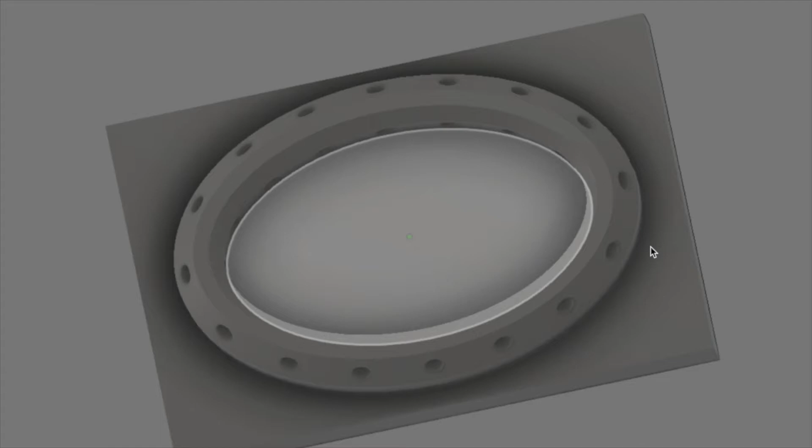Okay, today I'm going to talk about how to design soft jaws for your vise.

So, soft jaws, most commonly they're aluminum, but you can do steel too. The purpose of a soft jaw is to have a jaw that is replaceable on your vise, which you can cut into and

make different shapes for holding different parts. So your typical rectangular part has a straight cut. Here we have a straight cut for holding like a square part or rectangular part. You can also see I've cut some, like this is an elliptical shape for an elliptical part. I have an even crazier shape in here, and then down below is for holding a round piece of stock.

So they're really nice because you can cut a lot of different shapes into them to hold different oddly shaped parts. They also protect your vise. In a lot of cases, if you're going to crash your machine, you run into the soft jaw before you actually run into the vise, which is helpful.

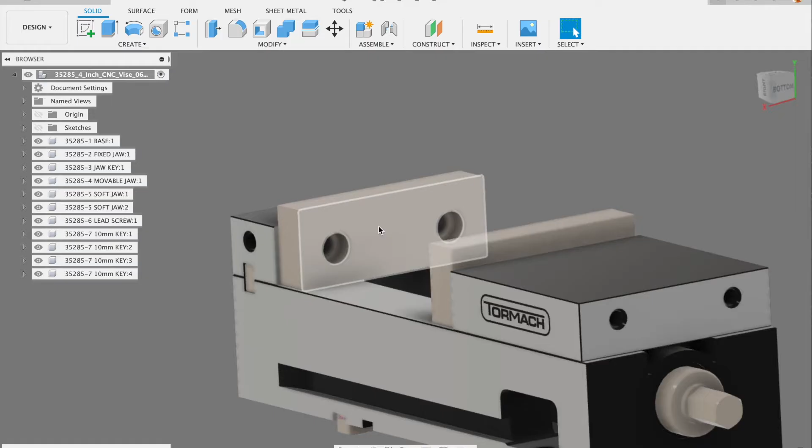So let's get started. I downloaded this vise from the Tormach website. This is the vise I have on my machine, it's a 4-inch vise. I went directly to the Tormach website, found their 4-inch vise, and it gives me some of the details on the hole tap sizes and stuff. It's either in one of these, it gives me the step file, which I downloaded and uploaded into Fusion 360.

So look at the vise you have, see if you can go to the manufacturer and find that step file or a similar CAD file. And there's also some CAD files for vises saved in Fusion 360's CAM examples - that should be already in your data panel here.

So, coming back to this, there's a few things I want to do. Very first thing, I'm going to right click on this top level component and come down to the very bottom, capture design history. So for some reason, when you import a model like this into Fusion 360, it turns off design history capture, and we absolutely want design history to be captured. So that's the first thing.

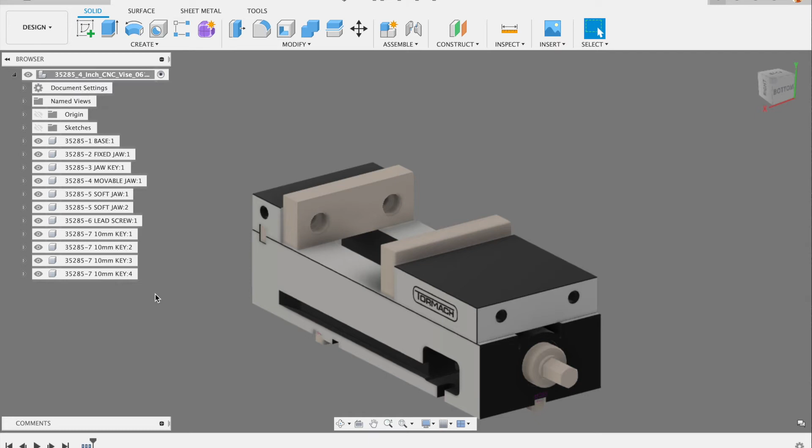The next thing, let's see if I can - so I'm going to select the top one, hold shift, and select the bottom one. So all these components, I'm going to right click and ground. And the reason I'm doing that is because the reason for components is you can move them independently of each other. And since I'm going to use some geometry from this jaw and from this face down here, I don't want those moving around on me because my soft jaw is going to be dependent on the location of those holes.

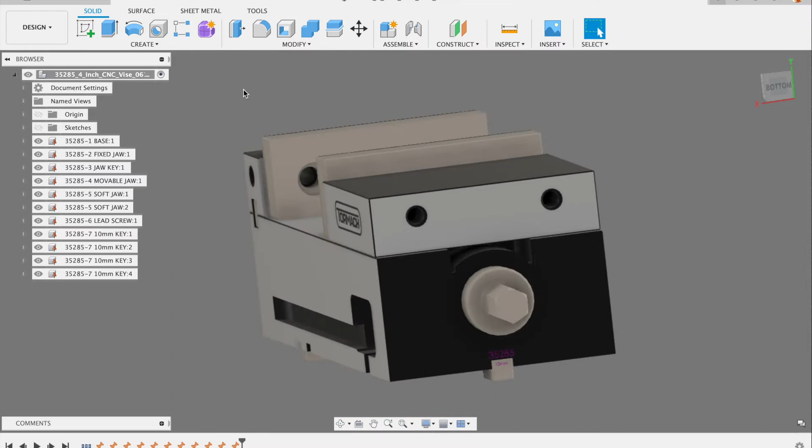So those are the critical first steps, and you can see down here, I already have that design history being captured where I'm grounding those.

Alright, next thing I'm going to do is create a new component. So I'm right clicking on the top level component, new component. And this is a new thing in Fusion 360 where you can create your new component as an external file, which is then linked to this file. It's kind of modeled after the way things are done in SolidWorks, where you have assembly files and then part files are separate, so you can work on your part outside of the assembly while it's still linked to that assembly.

For this, I'm going to be working on this part only in this assembly, so I'm just going to keep it internal. So the name I'll just call Alex's soft jaw, and everything else is good. I'm going to hit OK.

And as soon as I do it, it activates that component, and everything else becomes transparent. So let's see what we want to do here.

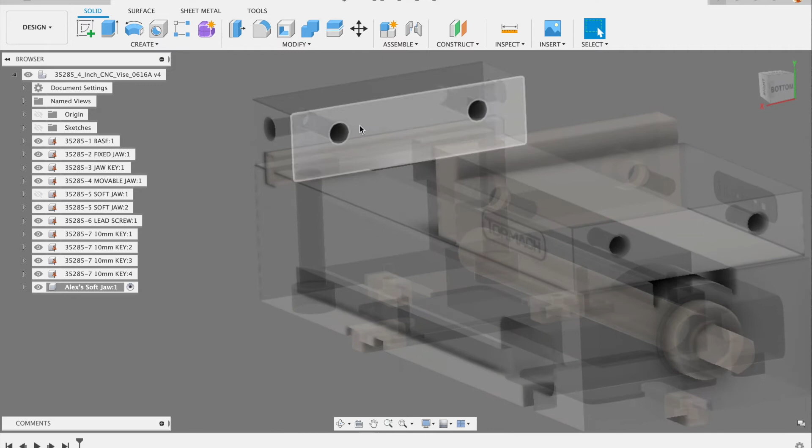So this soft jaw, if I click on that soft jaw, it shows me which component it is here with this weird underline striking stuff. So I'll turn off that component because I want to create my soft jaw on this face where it's actually going to go. So while this component is activated, I'm going to create a sketch.

Click this face. And you can see that rotated the whole vise around on me, so I'm just going to rotate it back to where it was. I'm doing this by clicking the center button on my mouse. I have the SolidWorks style mouse controls activated on mine.

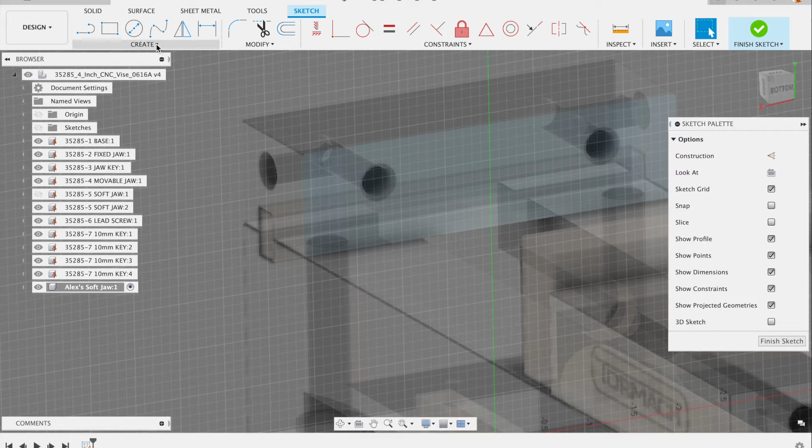So I'm going to need some of this geometry, these edges, especially this edge and the location of these holes. So to get those, while I'm in sketch, I drop this down. There's this Project Include. You can also see a P here. I could also just hit P on my keyboard to access this, which is what I normally do. So I'm going to project those edges, hit OK. So now those edges are part of my sketch.

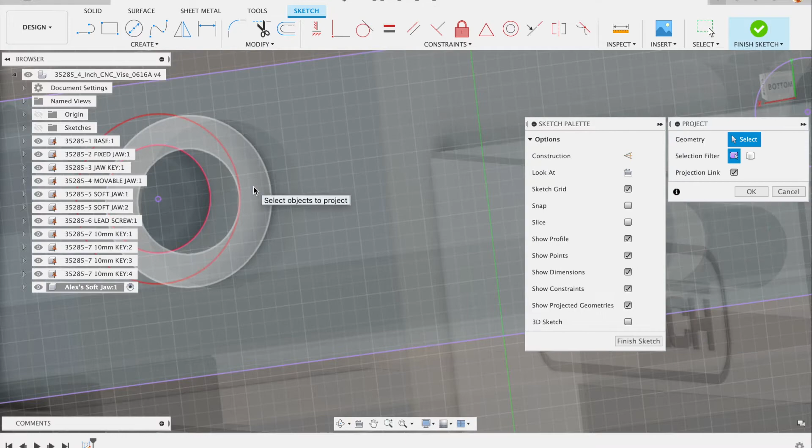And then I'm going to turn on this existing soft jaw. So I also want to have these edges. So I'm just going to hit P on my keyboard, select that face and that face, and then make sure I hit OK over here.

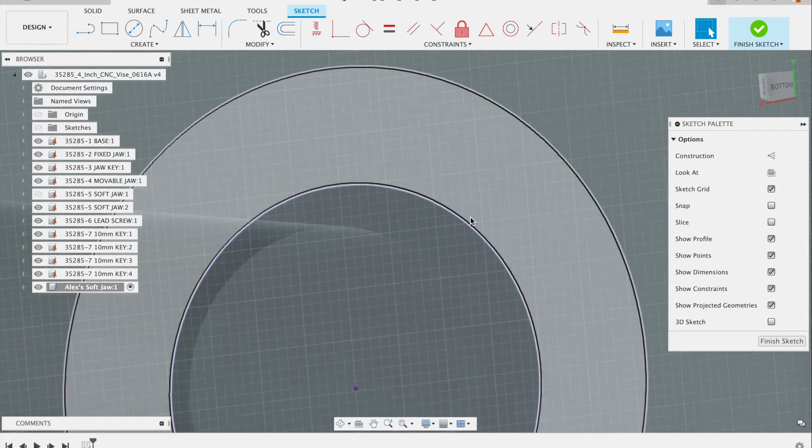So then I can turn off the visibility on that soft jaw again. If I zoom way in, it looks like these two edges were nearly the same. I think this inner edge was the original one that I don't want, so I'm zooming way in. I'm going to select that inner edge. I'm just going to delete that because I'd rather have the edge that came off the soft jaw. So inner edge, delete on my keyboard.

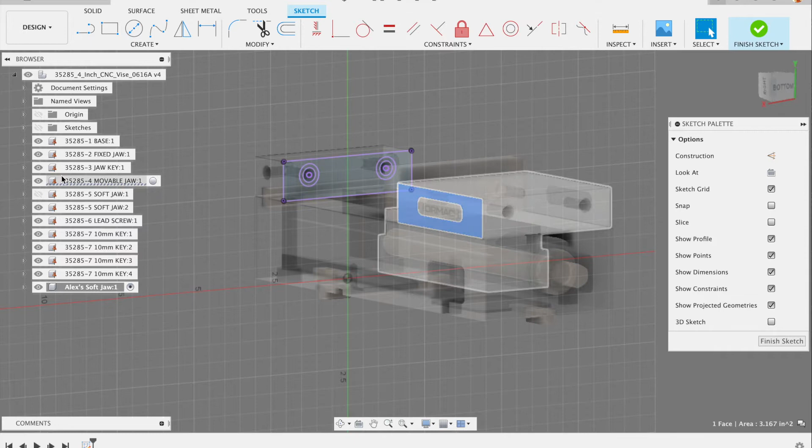Okay, so while I'm here, all this stuff is kind of blocking my view of what I'm trying to do. So let's see what component this is. This is the movable jaw up here, I'm going to turn off visibility on that. This is the other soft jaw, I'll turn off visibility on that. And now I can see what I'm doing, while I can still see enough of the vise that I know I'm doing what I need to do.

Okay, so we have the geometry we need on here. I'm going to create a 2-point rectangle up here, and I'm just going to draw it oversized, kind of to here.

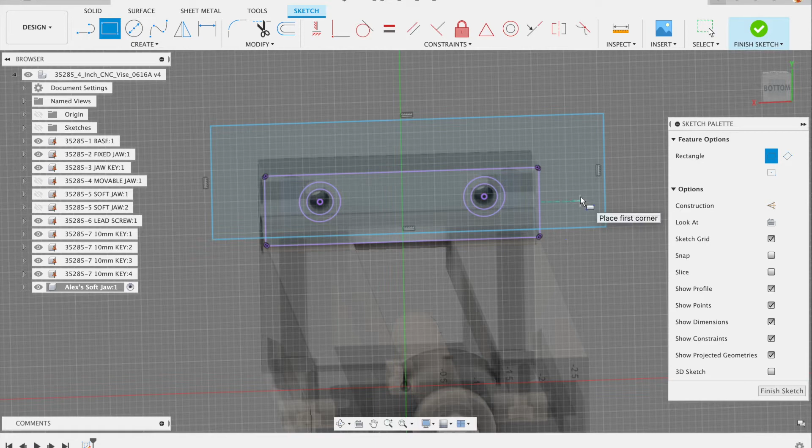So I want a few things on here, so I'm hitting escape to get out of that. I want to make sure that my vise jaw, as I'm modeling it, stays centered on the vise. So I need to add some constraints to do that. And then I also want this line to be collinear with this bottom line, so that the bottom of my vise to the center of this hole is maintained. So that's an important dimension.

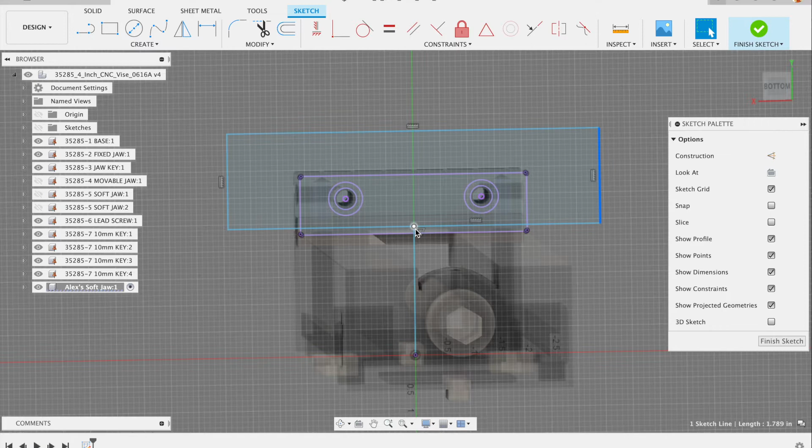Okay, so first thing, I'm going to create a line from the origin up to the midpoint of here. And I think that actually, okay, so that's a line from the origin to the midpoint. First I'm going to click that line.

You can either hit construction over here or X on your keyboard, but now that's a construction line. I want it to be a construction line because construction lines don't interfere once you're starting to create your solid model. So you can't extrude off of a construction line - it needs to be a solid line like this we have. So I just like to create a construction line so that it doesn't interfere when I go to extrude.

So I want that line to be constrained to be vertical. So I'm going to hit escape now. So that line is vertical. Now you can see if I pull these out, regardless of the width, it is going to stay centered on the vise because this line is constrained vertical and it's at the center point of this bottom line. So that's what I wanted.

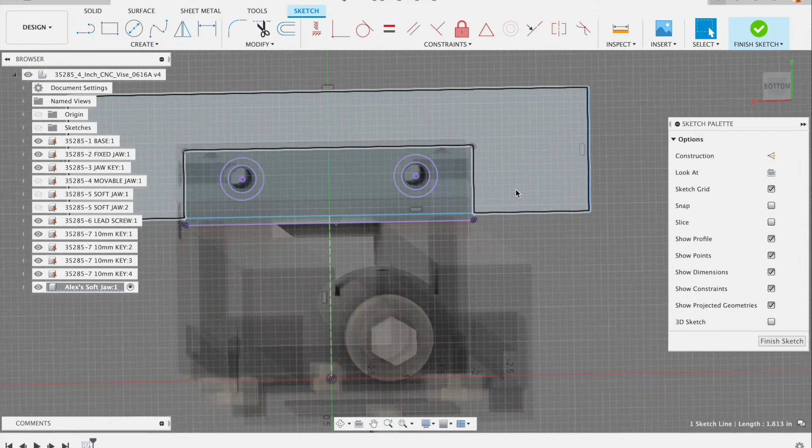Okay, so my other thing, I want this line to be coincident with this line. So I'm going to hit the, collinear, that's what I meant - collinear. So I'm going to hit the collinear constraint, click this line and that bottom line. Did that not work? Oh, so I held shift to do that. I'm going to hit escape. So that line is coincident.

You can see, depending on the background color you have - so my display settings, my environment, I use Grey Room - so depending on the background color you have, this might be a different color, but with this background color, that line turned white, which means it's fully constrained. I think if you have a white background, it'll turn black. But either way, that line should change color to show that it's fully constrained now.

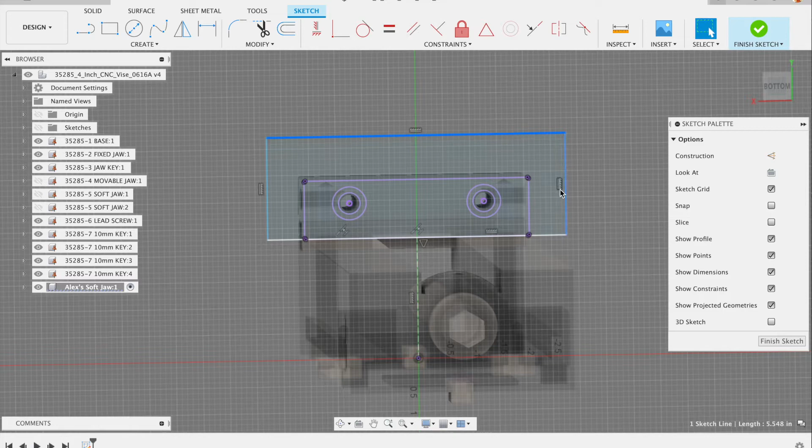So this is doing exactly what I wanted to do. I want to be able to adjust the width of the soft jaw and the height. So even though the vise is 4 inches wide, I could go a little wider on the soft jaw if I just want a little more gripping space.

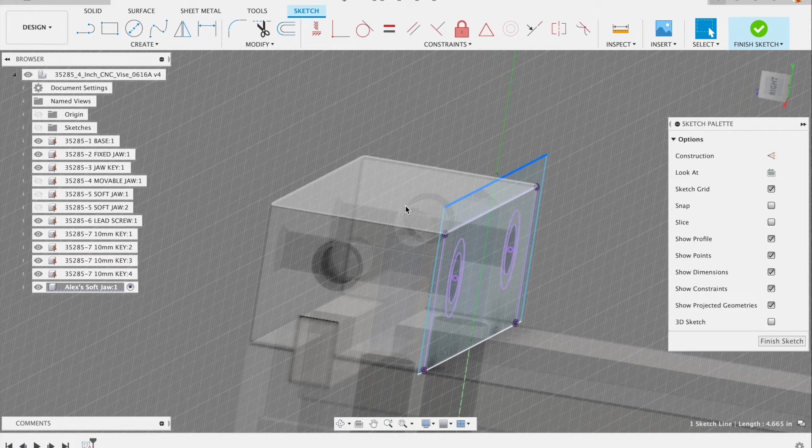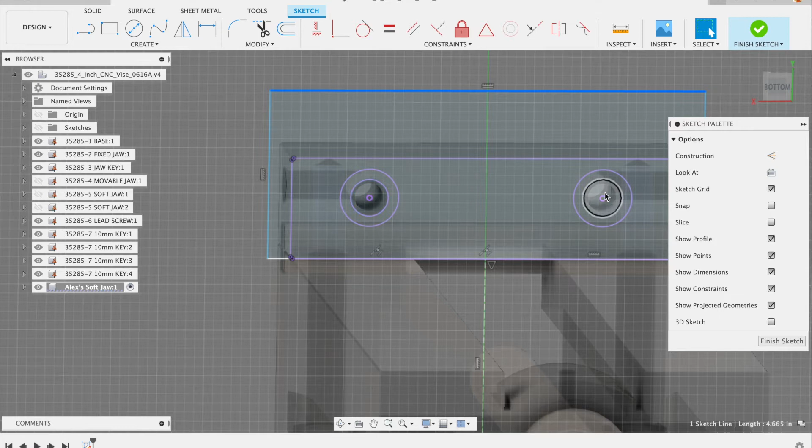Alright, so another thing I need to do - I saw a Haas tip of the day video, or one of the Haas videos on YouTube, where the famous Mark Terryberry suggested using slotted bolt holes in your vise so that you can actually flip this vise or the soft jaw over once you've used up one side, and now you have a fresh soft jaw. So it's just a better use of your materials when you do that.

So to create a slot, I need to make sure that the distance from this hole to this edge is the same as the opposite end. So there's basically going to be another hole at this end that is the same distance, and then I'll connect those into a slot.

So how do I do that parametrically? I'm going to create a line from this hole down to this edge, and I realize that's not vertical - I did that intentionally. And then I'm going to create a line from this edge downwards. So this should be vertical. I'm going to left click, constrain that. Okay, so that made both those vertical.

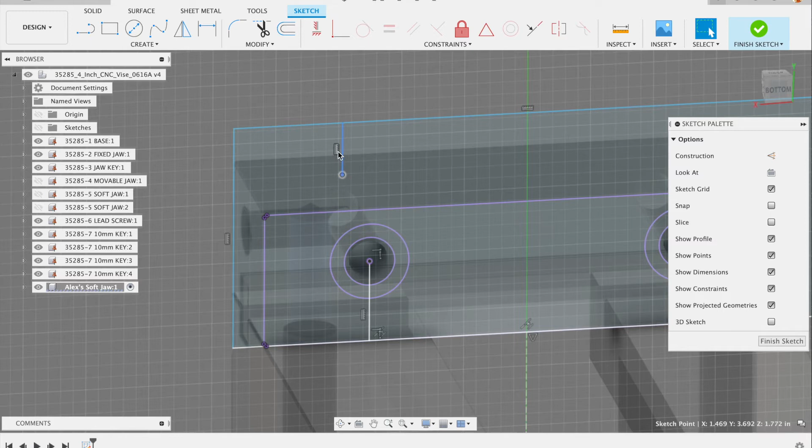So when I put this line in here, it created a parallel constraint, it looked like. That's fine, but just to show you how I would have done it, I'm going to click on that constraint, delete on my keyboard. So now it's no longer parallel. And you can see just by dragging it vertical, it added that vertical constraint on there.

So there's a couple other things I need to do. I'm going to hold shift and select both of these lines. I want them to be collinear. You can hit escape again. And then these lines need to be of equal length, so I'm going to hit shift, select both of these, and hit equal up here. And then escape again.

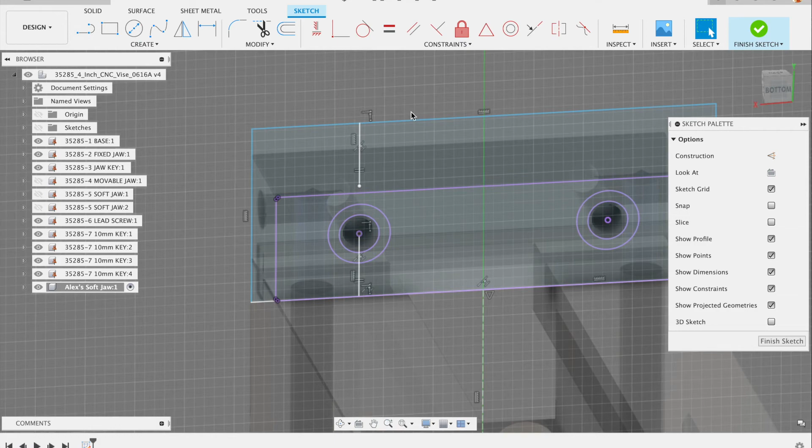So I can drag - I don't want a vise jaw that's this tall, but just for example, I'm just going to drag this up and work with it at that point. So now I have these two circles here, which represent the through hole and the counterbore on my soft jaw.

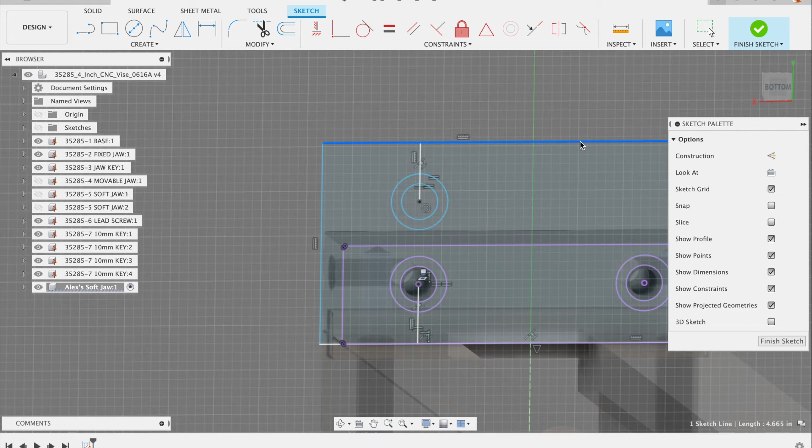So I just hit C on my keyboard, which is circle. I'm going to draw a circle there and another bigger circle. I'm going to select this, shift select the inner circle, and hit equal. And if you look at my mouse icon, I still have equal selected, so I'm going to select this, and now those two are equal. And hit escape. So now this hole is always going to be the same distance, same size as these holes, and the same distance from that edge as this is from this edge. So I can drag this up and down, I can drag this over and over, and those are constrained to where they are.

So I'll do one other thing. I'm going to do a line from here to here, and I'm just using this as another way to constrain things. I want this to be a construction line, so it's dotted. So now I'm going to do another line that is horizontal. I'm hitting escape to finish that line. So I want these two lines to be the same length.

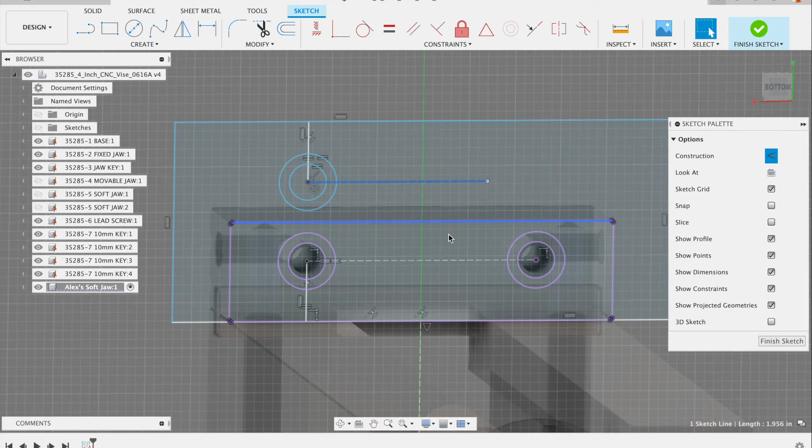So this should be a construction line, so X on the keyboard. Shift select both of these and make them equal. So now this is a location for my other holes. Again, I'll do circle, little circle, big circle, and I'm going to shift select these two circles, make them equal, and then I'll do, while I still have the icon up, the outer circles. And then escape.

So this would be a good time to hit save if you haven't already.

I just realized that this line is not a construction line, which I want it to be, so I'm going to hit X on my keyboard. And then this line also X. It's now a construction line. Okay, so it's behaving as I want it to.

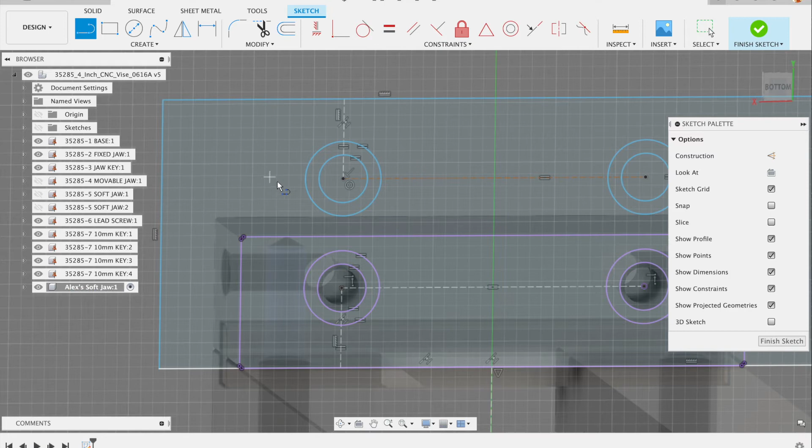So I want these to be slots. I don't actually want a hole above another hole. I want it to be a slot so I can just machine it as a slot rather than machining two holes - seems like it'll be easier. So I'm going to create another line. I'm intentionally not doing it right at the edge because I want to go back in and add a constraint. So I'll do there to there, there to there.

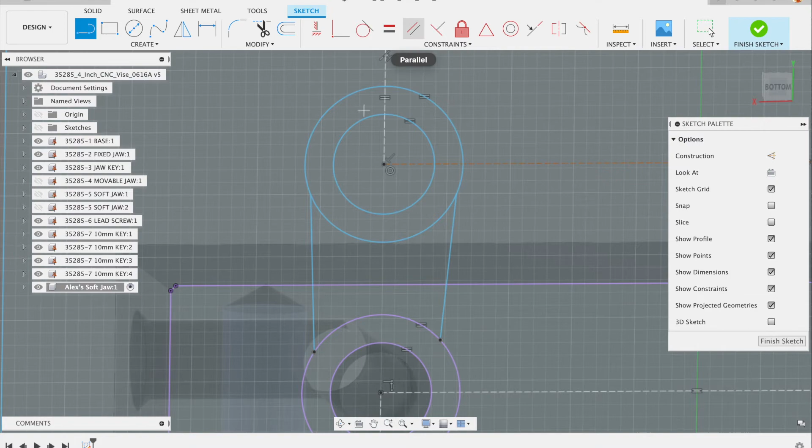So now that I look at this, I'm thinking a little bit ahead here, but this is a symmetrical part, so there's no point in modeling this whole thing and then modeling it over here. It's good to leave these here for reference, but I'm just going to focus on the one side from here.

Got those two lines here. By the way, you can't see my keystrokes, but I hit escape all the time. Escape is my best friend, because anytime you have something on your mouse icon that you want to go away and get back to the default mouse, just hit escape.

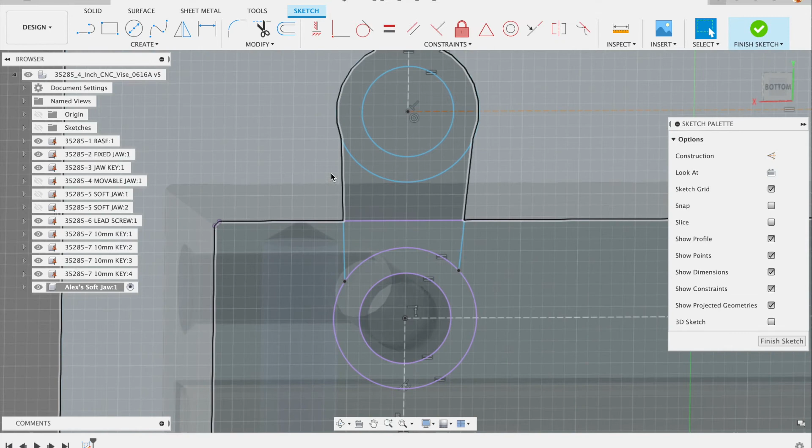So obviously these two lines are not right. I intentionally did them kind of wonky just to demonstrate how this is done. I want this line to be tangent to this circle, and this line tangent to this circle, and this line tangent to this circle, and this line tangent to this circle. Now it's exactly where I want it to be.

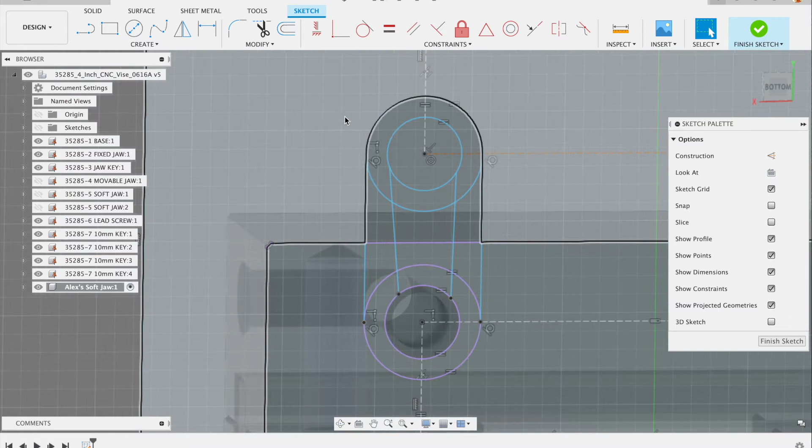Escape. I want to create now again lines from here to here, here to here. And I'm going to make these tangent here to here, here to here, here to here, and here to here.

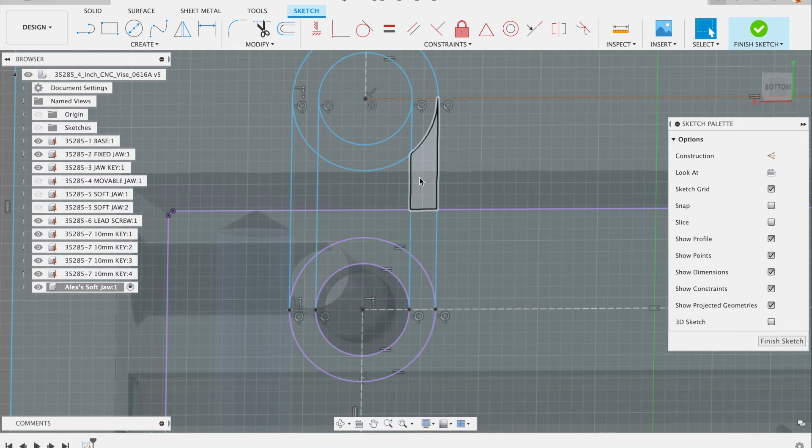So that gives me the geometry I need for my slot. If you've used a lot of CAD software, you might be tempted to trim out, so I could trim away this geometry. In Fusion 360, I tend to avoid trimming when I don't need to, because I can still select the areas I need for extruding—it'll be multiple regions I select. But when you trim, you start to lose your constraints, and sometimes that gives you unintended consequences. So I'll just leave it at that.

Alright, just thinking through what I need to do next. I need to put a dimension on the height, a dimension on the width, and a vertical line that I can reflect over. Actually, you know what, I really don't even need that vertical line because I have a line here—I can use that line. And my y-axis is that line, so I actually don't need that line.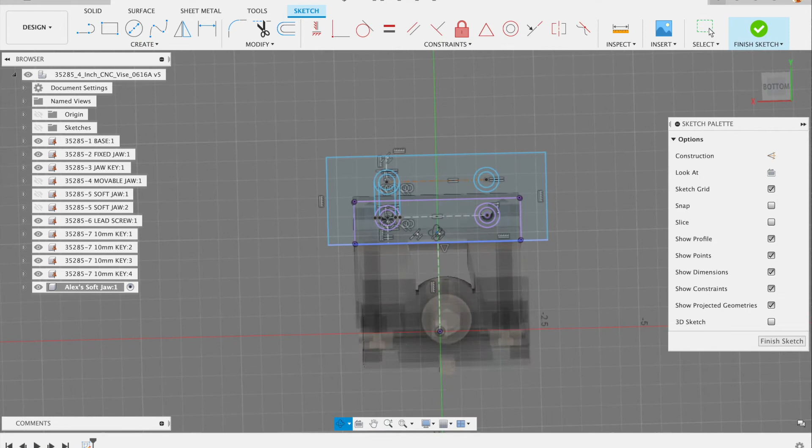So, dimension. I'm going to hit D on my keyboard—you can also find sketch dimension at the bottom of the create menu here, or D on the keyboard. I'm going to grab this line, place my dimension over here, and this right here is a new thing in Fusion 360 where I can actually name my parameter in my dimension. So I'm going to say height equals, let's just for now make it 2 inches, and enter.

So that's a 2-inch tall block. Normally I would just type 5.5 or whatever, but if I want to create a parameter that I can later edit, I can do it this way: width equals 5.5—I'll call it 5.5 for now. Or let's just do 5. Width equals 5. That should give me about a half inch of overlap on either side.

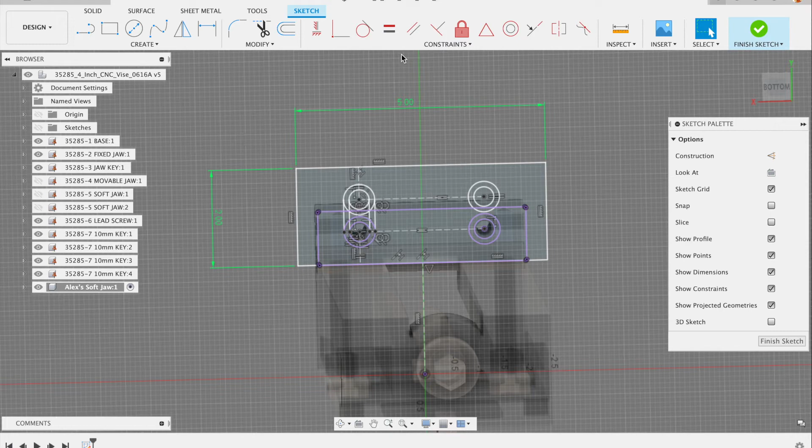So I'm going to hit escape. This sketch—you can see when I added those dimensions, it fully defined everything that I need defined. So I'm happy with that, and you get a finished sketch up here. Now I can start extruding.

So you can either hit this icon up here or hit E on your keyboard. I always tend to hit E on the keyboard. There's lots of ways I can do this, but I'm going to first just extrude everything—let's see if I can do it that way. So I'm just going to window select everything.

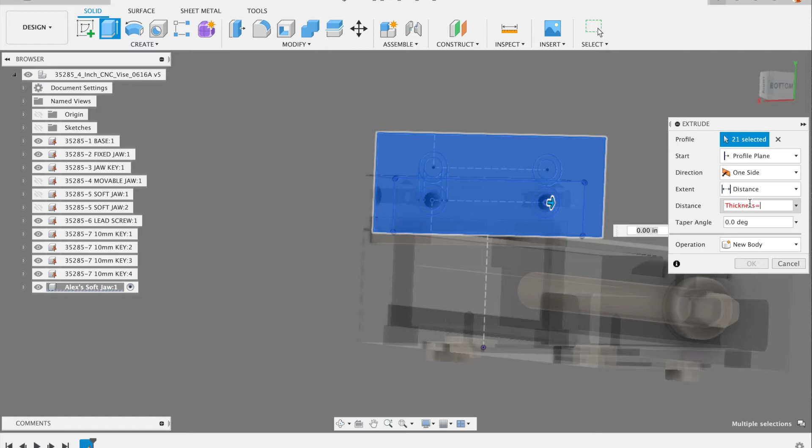And my distance—I also want my distance to be parametrically dependent, so I can change that parameter value. Let's see if this works. This should be a new thing too: thickness equals, I'll just call it 0.75 for now. And then okay.

Again, I'm going to save at this point. It seems like a good point.

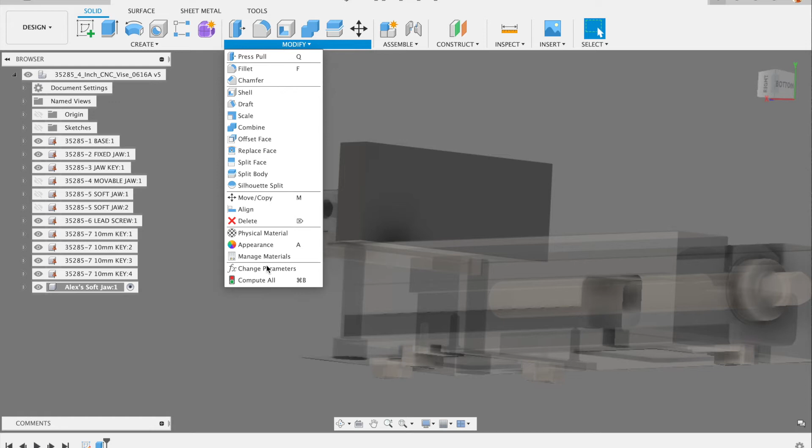So you notice I typed thickness, width, height—I'm going to show you where those went. So, change parameters. Within my model, if I drop all these down, in sketch 1 I have width and height, and then extrude 1 I have thickness. I want to be able to change any of those anytime, so I'm going to star height, width, and thickness, and then I can just close this. Those are available for me to come in and change this value anytime, and it will update in my model. So I'm going to say OK there.

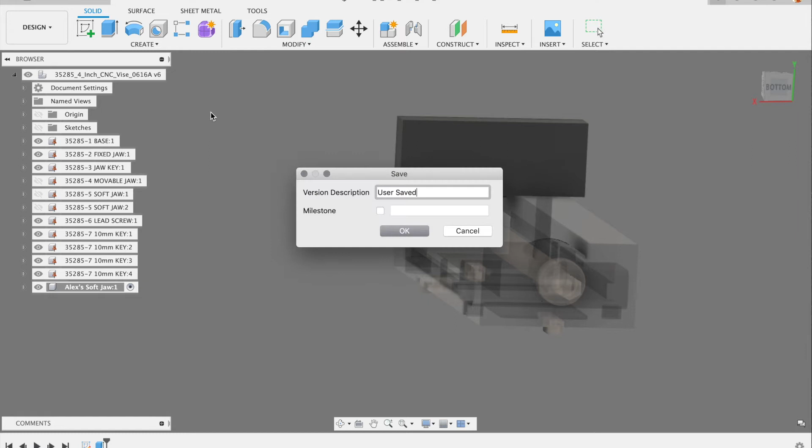Save again. Okay, so now I need my slotted holes.

So when I extruded off of that sketch, it hid that sketch on me. So if I drop down my menu here, I go into sketches, turn the visibility back on, and now I can extrude.

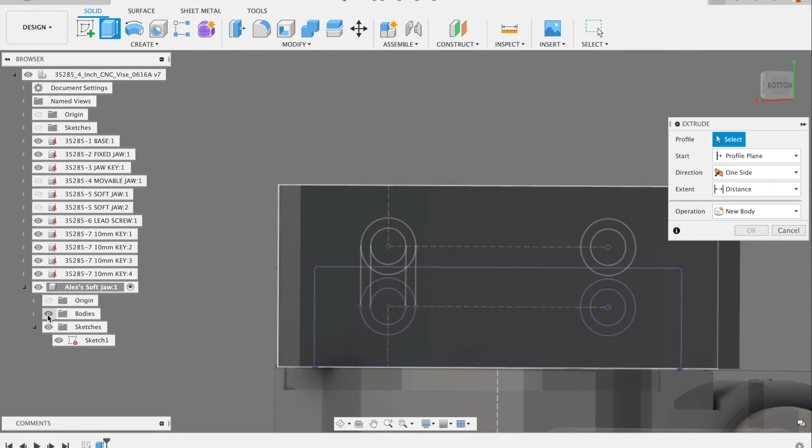So it's not letting me select the sketch through here. What I can do is just turn off my bodies for a second. I'm going to extrude this. So that's the center of the slot. I want that to come all the way through. So just select it, and I'll turn my bodies back on. Then I'm going to drag this arrow out.

Let me see, objects to cut. So I could drag it out far enough that it's going to go all the way through. But the better way to do this is on the extent distance, I'm going to go through all.

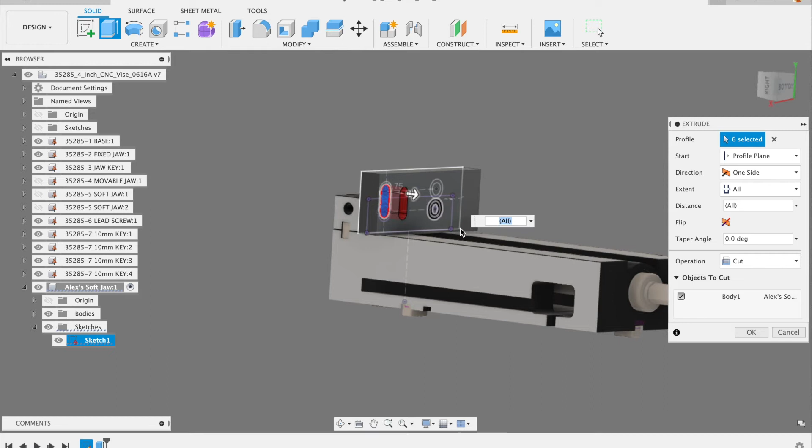So when you do that, you need to check your objects to cut. If there was some other stuff in here, like if this movable jaw was visible right now, it would probably have cut that too. So I could unselect that movable jaw. Since that wasn't visible when I did the extrude, it's not listed down here, but if you ever run into that where it wants to cut through everything in its path, you can uncheck the ones you don't want to cut.

So that slot is there, that's good. And then I want to cut the outer. If it was a circle, I'd call it a counterbore. I guess you could still kind of call it a counterbore on your slot.

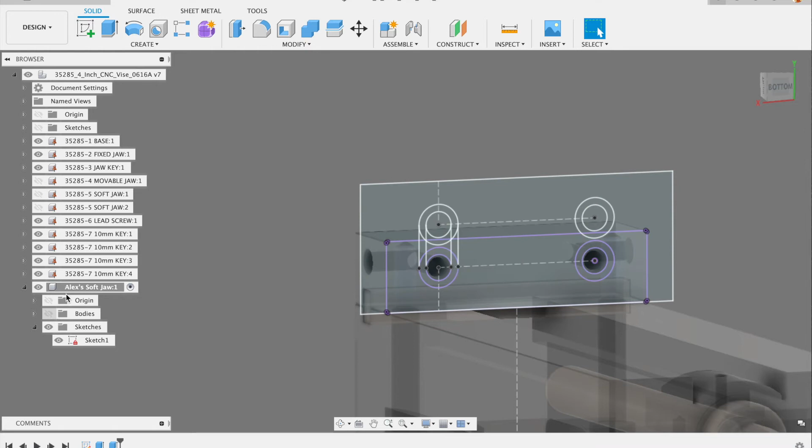So I'll do the same thing. I'm going to turn off the body just so I can get to there. Extrude. And I'm going to individually select these regions that are part of what I'm going to use. Turn that body back on.

So now you can see our sketch is not on the side of the block that we actually want to cut that slot on. So rather than start at the profile plane, which is the sketch, I'm going to go from object and select this plane. So that's where it's going to start. And then if I go in, it'll cut in.

So I'm not actually sure off the top of my head how deep I need to go with that. So I'm going to just hit OK right now on that.

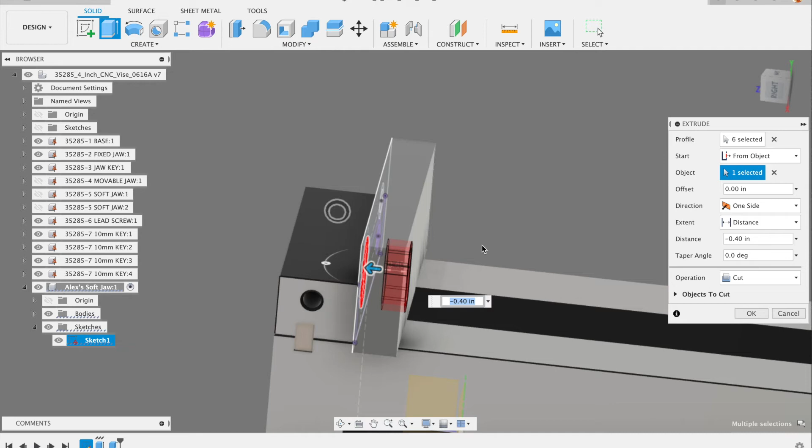And then I'll turn on this sketch too. I'm going to measure how deep they went on theirs because it should be a standard bolt that they modeled this off of. So you can go inspect, or you can just hit I on your keyboard, which is what I normally do. So measure, or I on your keyboard. I'm going to measure the distance from here to the bottom of that counterbore. And that distance is 0.375.

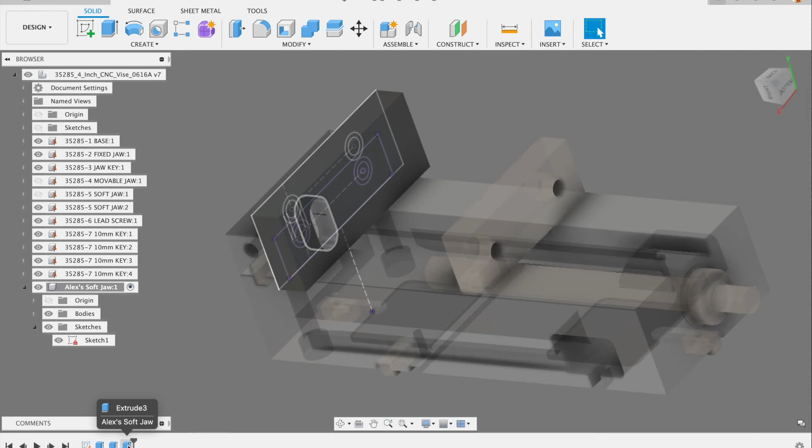So I know that. So I'm going to go back into Edit Extrude 3 here, Edit Feature. And I'm going to call this distance negative 0.375. So regardless of the thickness of this part, now that distance is always going to be negative 0.375.

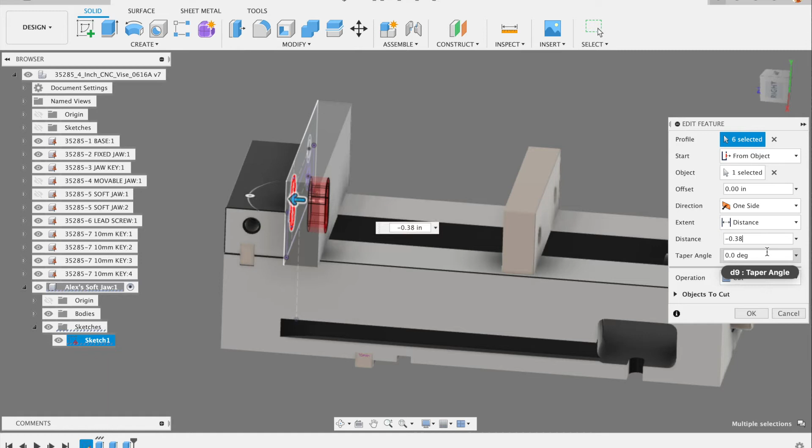Another thing I could do, I might just round that up to 0.38, because the last thing I want is for the head of the bolt to be sticking out of here. Or I might even go a little further and just call it 0.4. I want the head of the bolt to be fully under this surface, just in case I'm ever clamping a part right against this surface.

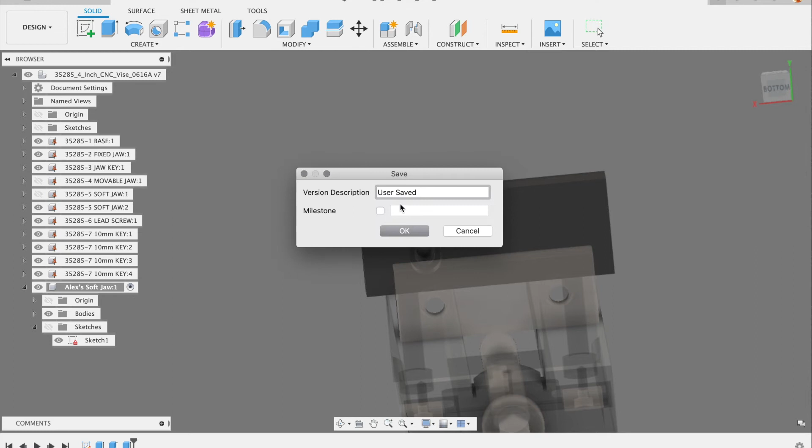So I'll hit OK now. So now that is where it should be. Now I'm going to turn off the visibility of this sketch over here because I don't need it. I'll hit save. Actually, I might need that sketch for one line.

Okay, so create mirror. I'm going to mirror, not mirror faces, but mirror features. So select features, objects. I'm going to select this and this. I'm selecting it from the timeline down here. It seems to be the easiest way to do it.

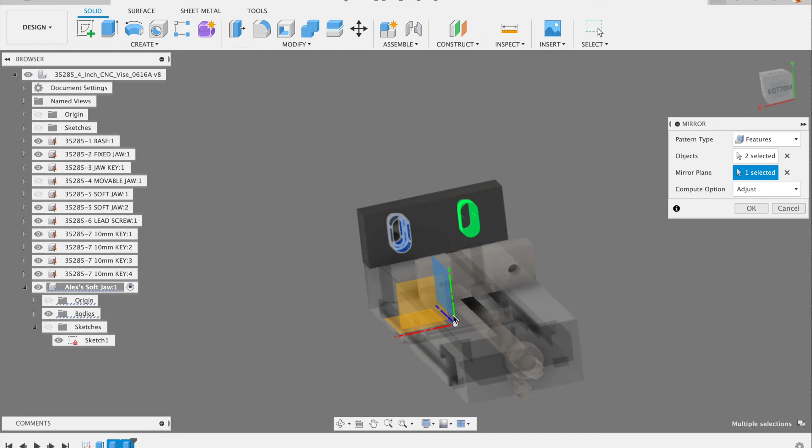Mirror plane. Okay, so I can just do it off of this. I'm going to use this plane. If you're going to use that, make sure that you did this grounding like I did, because if this becomes offset on one side from the origin, then you are no longer able to use that plane to mirror it, because you want it to be centered.

So another thing I could have done, if I'd created a construction plane, a mid-plane between the faces at the end of this block, that would have worked. And you know what, just to do it right, I'm going to do that. So mid-plane between this face and this face, because I know that I did my constraints right. I know that mid-plane is in the right spot.

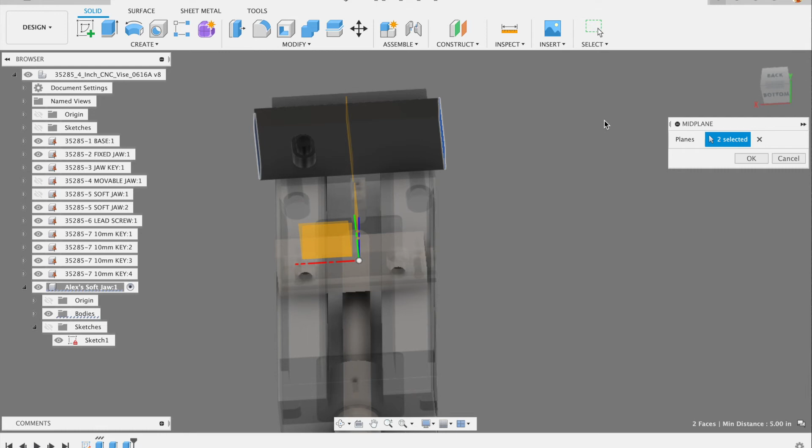So let me edit this feature. Oh wait, sorry, that's the midplane. Let me redo my mirror. I'm going to do features again, so I'll select these two extrudes. Mirror plane is going to be this midplane. I honestly don't know the difference between these options, I think it's so subtle it doesn't matter for a simple part like this, so I'm not going to worry about it. I'll just hit OK.

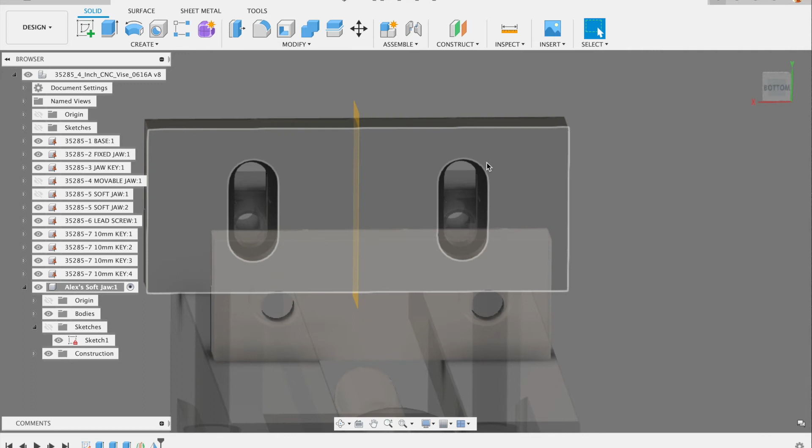And then you can see I have my slots in the right spot. So the nice thing with this is if I was to face down this surface a little bit in the machine and flip it over, my slot would still allow me to put that screw in and still be within that slot.

So I'm going to hit save again. This is a good idea. I'm going to turn off the visibility of this construction plane, I don't need that. So now everything from here on out is kind of cleanup work. This vise jaw is taller than I really want it to be or need.

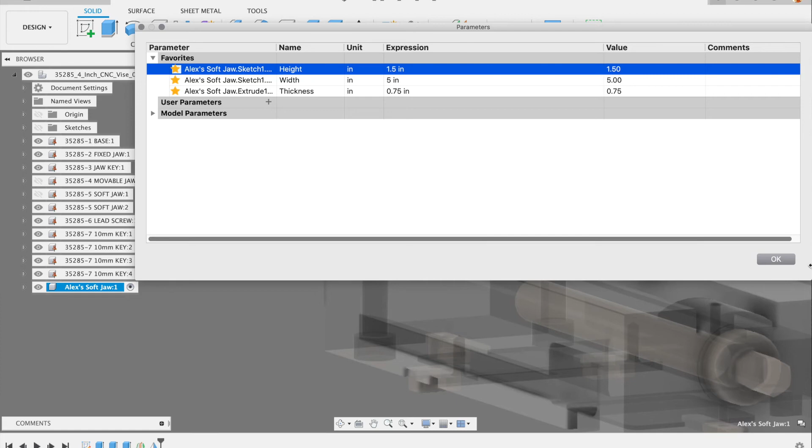So I'm going to go back into my change parameters and change the height of this to 1.5 and see how that looks. Oh no, something bad happened. Okay, so I was hoping that would totally work, but it didn't. So I'll try to explain why.

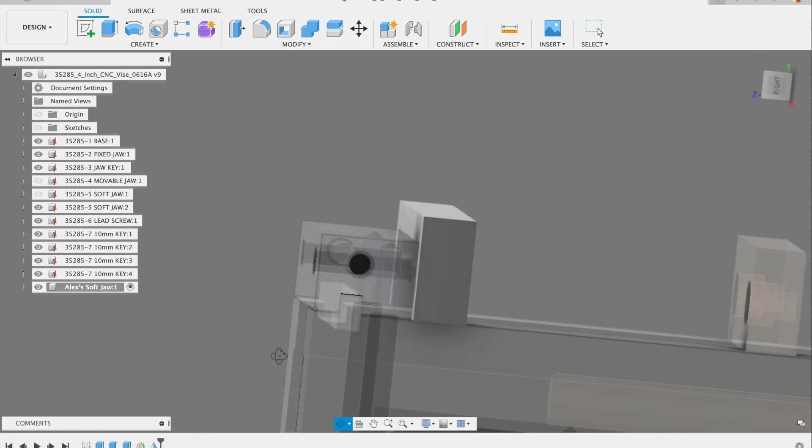So when I did probably this initial extrude - okay, so that selects all those, that's good, and hit OK. Sometimes you need to go back through your features and fix your selected geometry. So I'm going to look at this.

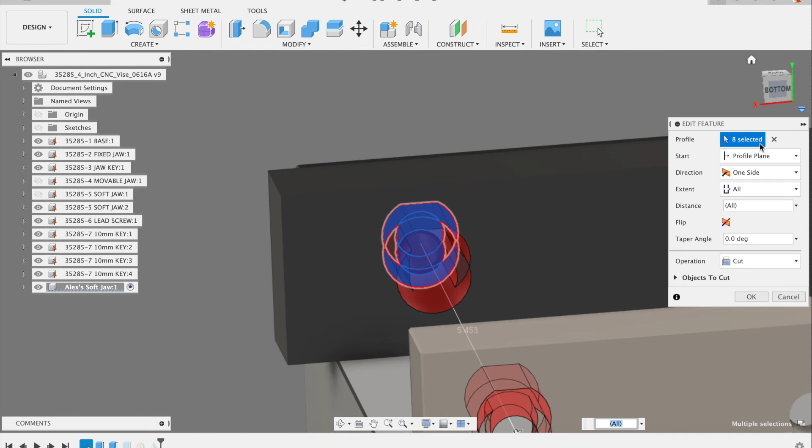Okay, so something bad happened here. This should be just extruding the center slot. So I'm going to X out of this, turn off that body, turn on the sketch, and reselect those regions. Maybe in this case, trimming would have helped me.

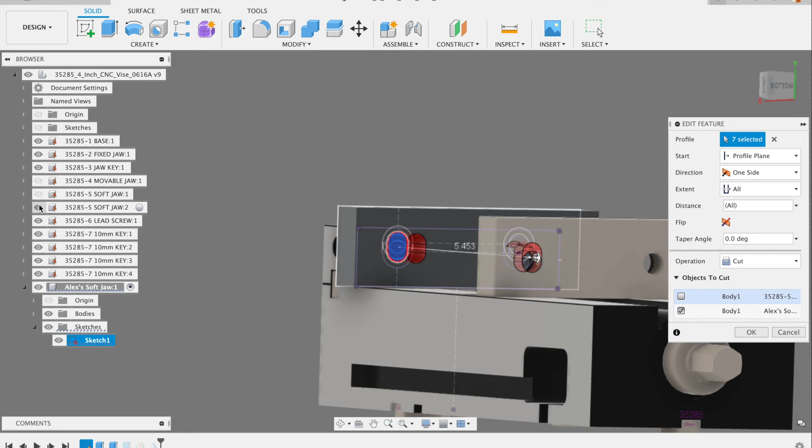Objects to cut - since this is visible now, I want to make sure it's my soft jaw and not this other jaw. I'm just going to turn off the visibility on that other jaw. So, okay here.

Okay, looks like I missed something. Edit feature. Did I miss something? Oh, that looks right. Okay, so it's on the other extrude here. Edit feature on this one. I'm going to turn off the body just so I can get to this. And that's what I wanted right there. And then OK. Save.

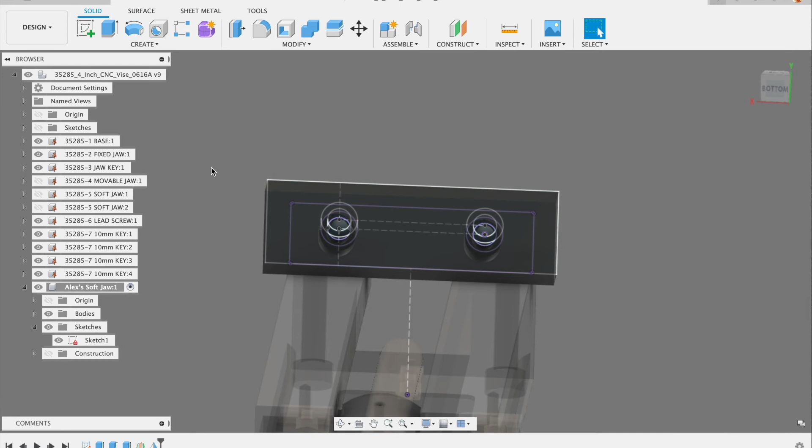So if that continues to give me problems, my guess is that we probably should trim off some of this just so we don't get the extra stuff.

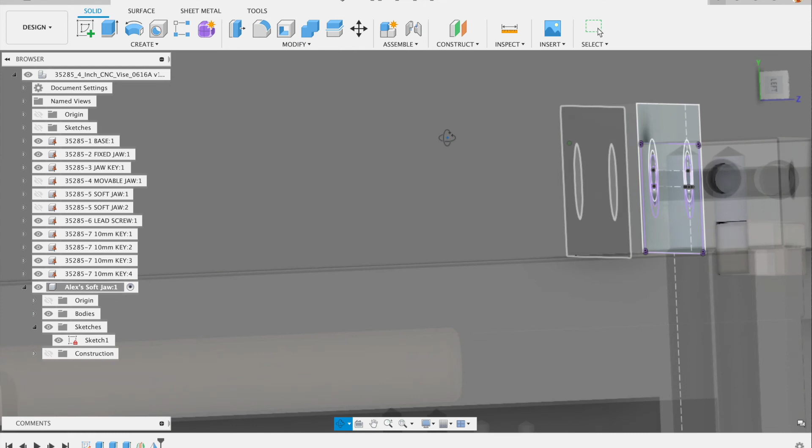Okay, so there's a few other things I want to just clean up in here. I'm going to make the width of this 4.5, just so I have only a quarter inch hanging off the edges here. So this looks like a pretty appropriate soft jaw for this vise.

The slots allow me to rotate this and flip this over, so if I turn off sketches you can see it a little easier. The distance from the bottom to this is the same as the distance from the top to here, so this soft jaw can be flipped over and reused.

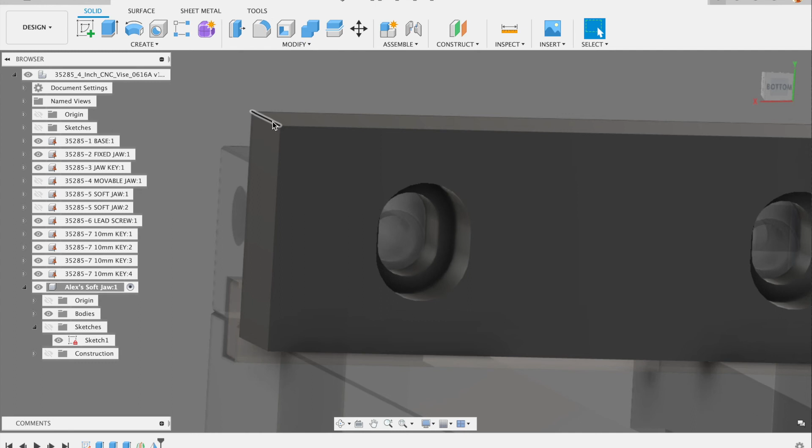So another thing I want to do is add some chamfers and fillets because these edges are all sharp. I like to fillet edges that can be cut by the radius of the cutter, like this corner, and chamfer edges that are going to be cut with the chamfer tool. It kind of has to do with the direction of the tool. If you can imagine, when we go to machine this, this is going to be the top Z surface, so our tool will be pointing down at this surface.

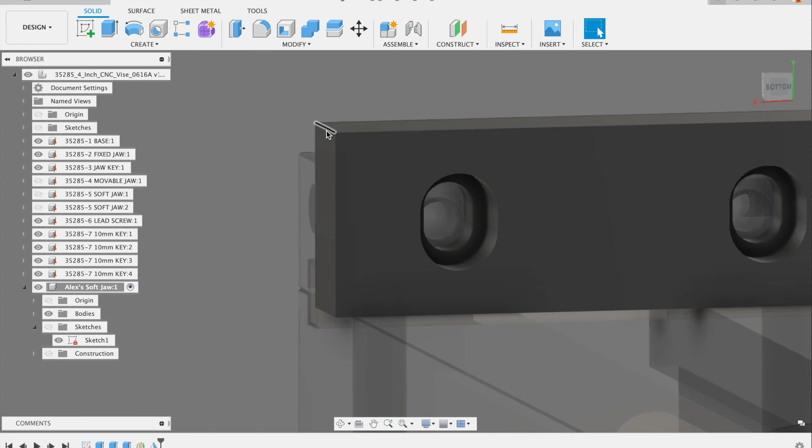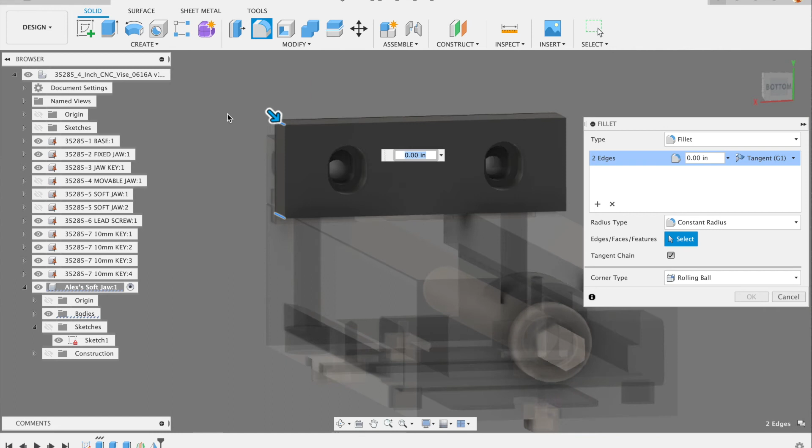So it makes sense to chamfer this edge, and then fillet these edges. I could chamfer this too, I just kind of think fillets are a nice look. And again, this is a soft jaw, we're really not concerned about appearance because this is a consumable thing we're using as a tool to machine other stuff. But just for doing it the way I like, I'm going to add fillets here.

The cool thing is you can select the edge through a corner like that, so you can drag this. I'll probably just do a 50 thousandths fillet. That's small enough that I can still put a chamfer on this top edge, but not so big that it's going to be problematic in any way.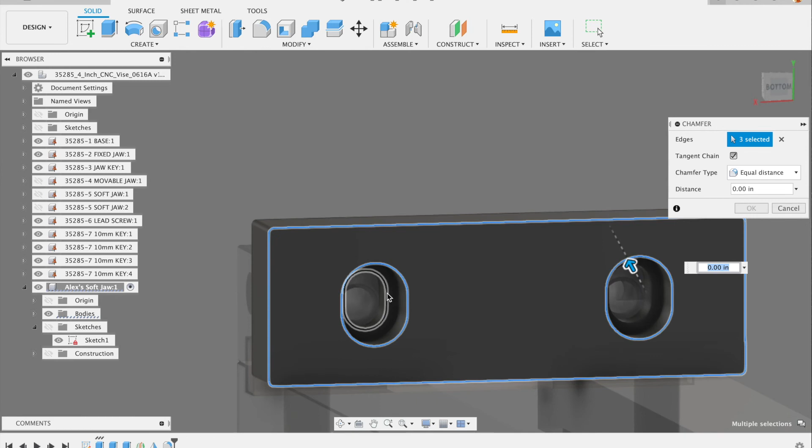Okay, so okay there. And then I'm going to do a chamfer, sorry - this edge, this edge, this edge. I could do this edge, but I'm not really concerned with that edge. I'm more concerned with whether it's going to cut my hands or not when I go to handle this. And while I'm at it, I can add this edge too. I could add the back of those holes, but I'm not really concerned with that either.

I think a good chamfer is 0.02 — enough that it's not sharp. This chamfer width does have to be smaller than the radius of this fillet for it to geometrically work.

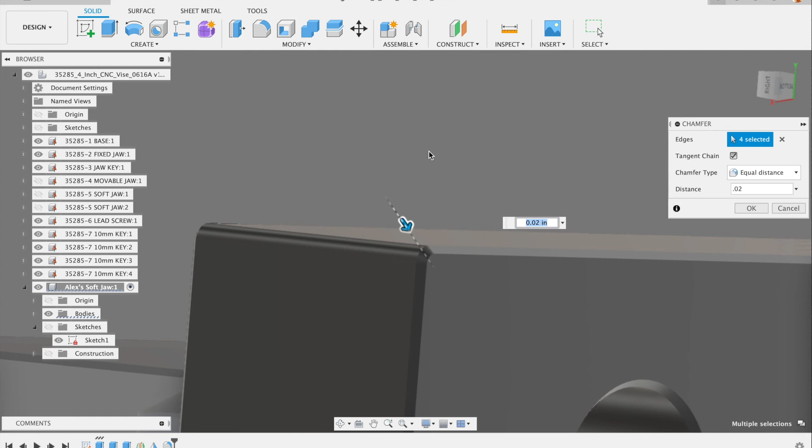Alright, so okay there, and then I would call that done. Again, if this sketch does become problematic as I change the size of this, I might go in and trim all that stuff out.

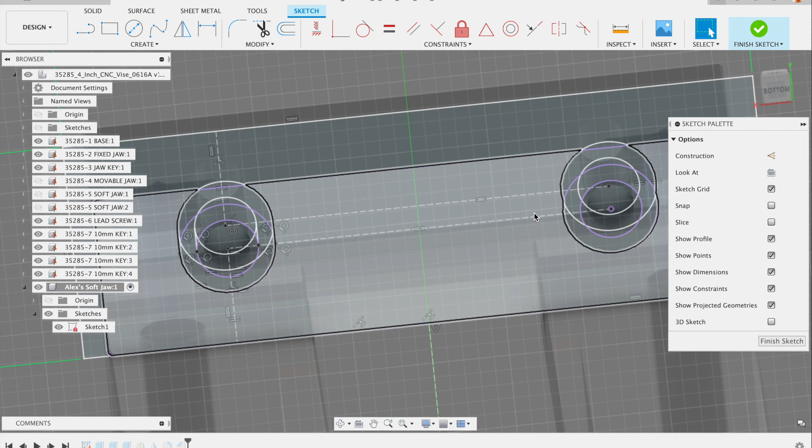Maybe I should just do that right now. So I'm going to go back, edit that sketch. Of course, it flips it on me. So I'm going to trim out anything I don't need. And I don't need to trim it on this side because, if you remember, we didn't even use this to extrude anything — all the extrusion was on this side, and then we mirrored it over.

So there's a scissors to trim — you can also hit T on your keyboard. So let me get rid of that. You can see these warnings, constraints were removed during the operation. So this is why I try to avoid trimming.

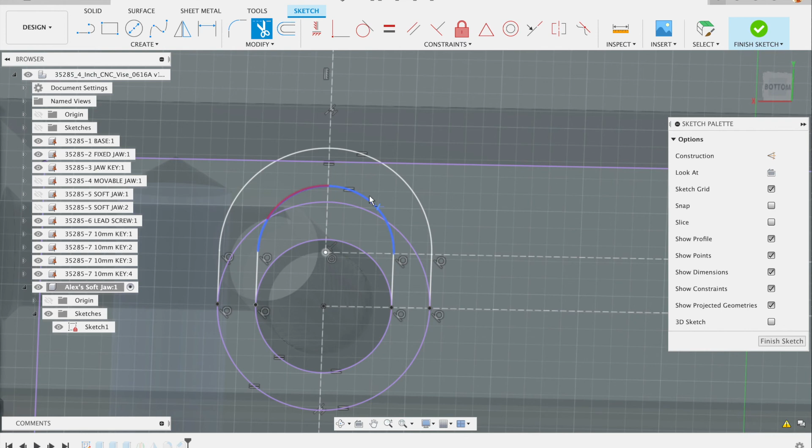Let's see, it's not going to let me trim anything else, so let me just trim this here. Okay, I think that's enough for it to work. Even though constraints were removed, it usually adds necessary constraints to keep everything working, and it's still white, so it's still fully constrained. I'm going to finish sketch.

Turn on my body. Okay, so that looks... if I turn off the sketch now, looks like something funny happened. So let me just drag this timeline back. I don't know if this is 3/4 inch thick anymore, so I can just click this edge — this is now 0.35. So I'm going to drag the timeline back and see what went wrong.

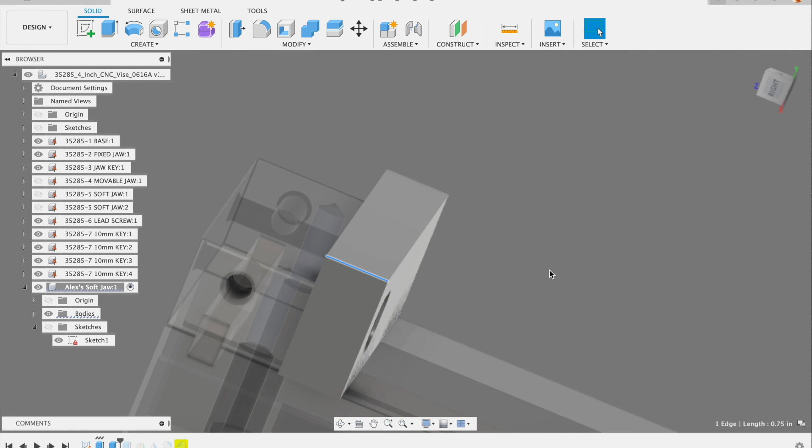Okay, so that's 0.75 thick. So here's my first extrude, which did what I want. My second extrude, I'm going to have to fix this — you can see that is not the intended extrude. So let me edit feature.

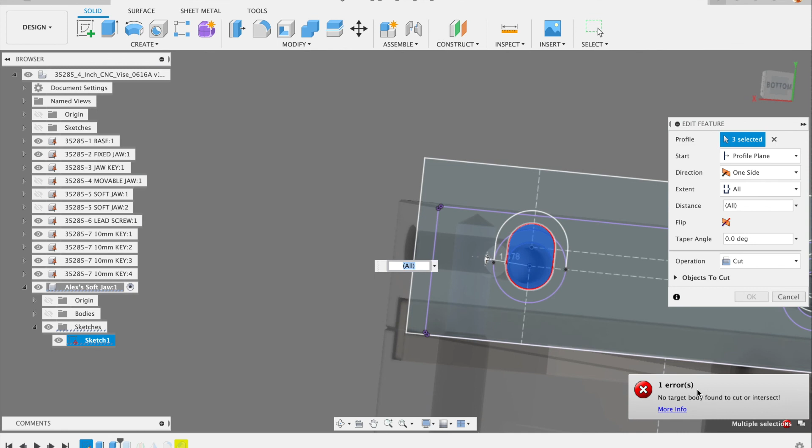I'm just going to get rid of all those, turn off the body, turn on the sketch, and then reselect the regions I want. And it's saying no target body, so I've got to turn on my body again, just so it has an object to cut — body 1. I'm going to say okay.

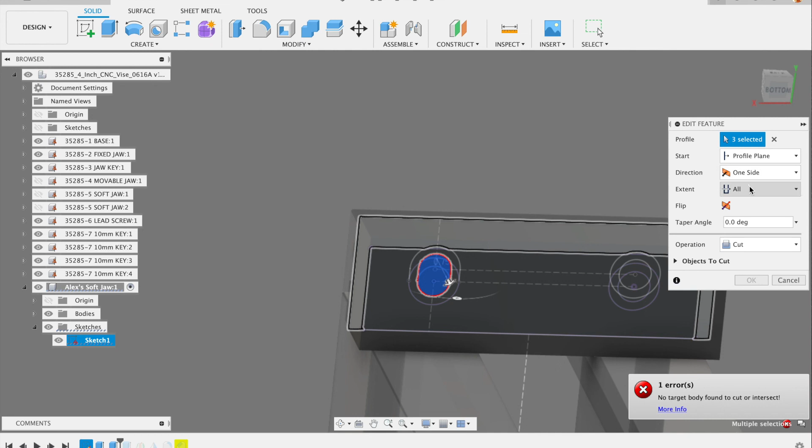Okay, and again there's an error, it's going the wrong direction. Edit feature. So let me first pull it in this direction — body 1, distance all, okay. Okay, so that's what I wanted.

I'm going to go to the next extrude, which it looks like there's an error again. Edit feature.

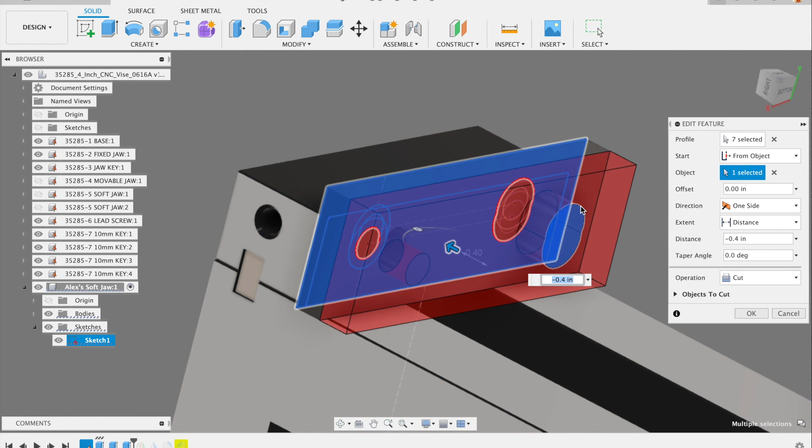It goes from object, and I'm not sure if it has the right object, so I'm going to reselect this face. And then I think it has the wrong profiles too, so I'll reselect the profiles.

So I'm going to turn off the body just so I can get to that sketch. Select 1, 2, 3. So now hopefully that's what I need. Again, no target body to intersect — so objects to cut, I want it to be that body. I'm going to say okay.

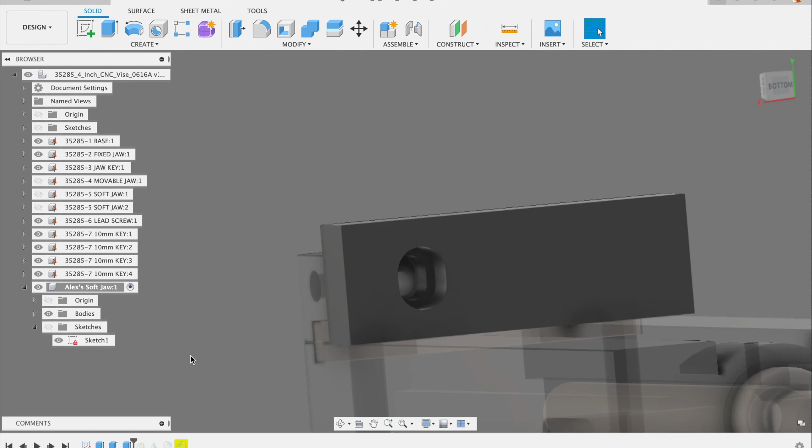I turn off the sketch, I can see again, that looks right. So I'll keep going through here. That construction plane is in the right spot. That mirror worked. We fillet at the 4 corners, and then that chamfer worked out.

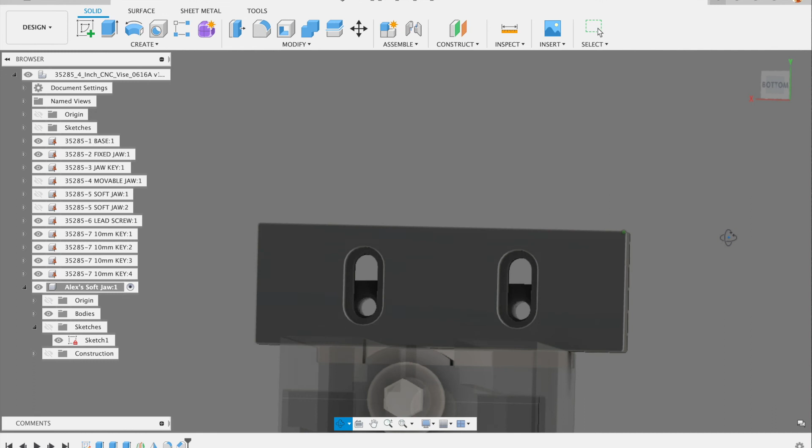So now, again, save. I'm going to check in my parameters, so let me just try to mess with this a little bit and see how that changes it. Let's say if I want to go back to a 2-inch height, a 6-inch width, and then maybe I'll call it like a 1-inch thickness. Okay, so that looks like it worked.

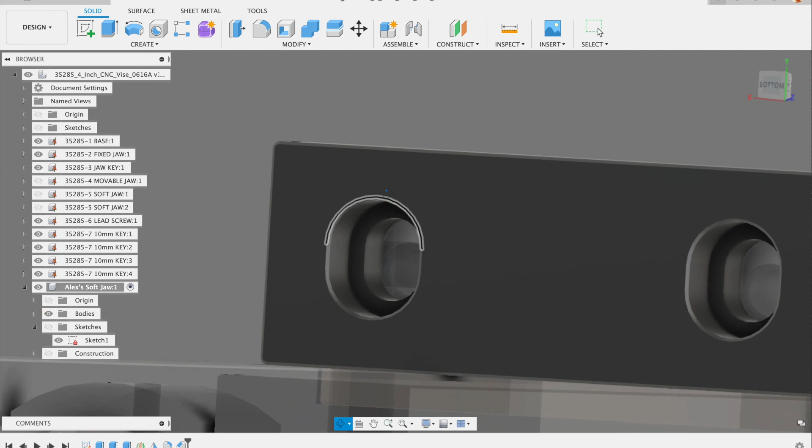So again, my whole intention here is to create a model which I can quickly change the dimensions of and have it still work. So I'm going to go back to, let's say I want to make a 4-inch width, a 1.5 height, and then 0.75 thickness. Okay, so those worked — that's doing what I wanted to do.

Looking at this, you can see the vise is actually a little bit more than 4 inches wide, because if this is 4 inches, then that vise is a little wider. So when I do this soft jaw, I probably want to just keep it at like at least 4.25, and really I probably would just do 4.5, because it is nice to have just a little hang off on the side.

Alright, so in another video I'll show you how to actually machine this, to do tool paths and machine it. So that's it for here — make sure you hit save, and I'll see you next time.